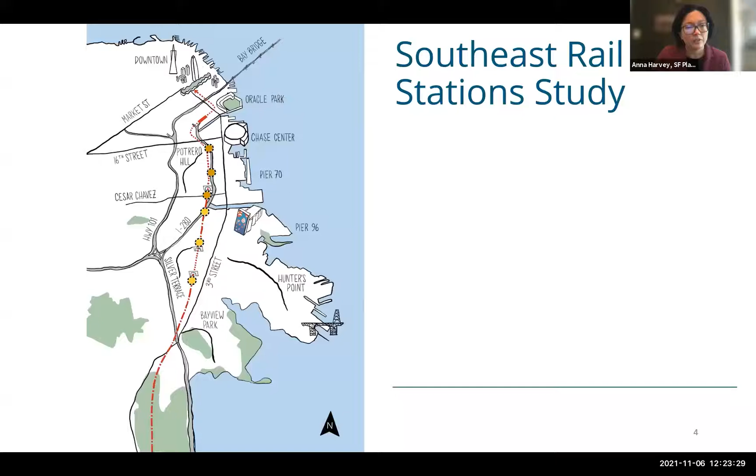Thank you, Anna. Good afternoon, everyone. As we covered in the first round of outreach last month, many changes are underway or planned for the Caltrain corridor in San Francisco, including the electrification of the railroad beginning in 2024, and two planned tunnel projects that will put Caltrain underground, starting with the downtown rail extension project from 4th and King, extending through a new alignment to the Salesforce Transit Center, and eventually extending south from that location beneath Potrero Hill through the Pennsylvania Avenue Extension Project, or PAX. That PAX project could require the redesign or relocation of 22nd Street Station.

The city also seeks to restore regional rail access to the Bayview Hunters Point neighborhoods, focusing on a station concept potentially at Oakdale Avenue, as previously discussed with the community, as well as looking at potential alternatives at Evans Avenue and Williams Avenue. Our meetings from round 1 were recorded in English, Spanish, and Cantonese, and you can watch them on the project website.

To arrive at the 6 alternatives under discussion today, the project team, consisting of staff from San Francisco Planning, the County Transportation Authority, the MTA, and Caltrain, along with a strong consultant team, reviewed the project limits and city and system-wide constraints. For example, we knew that we were considering stations between the existing 4th and King station in Soma and the Bayshore station in the city of Brisbane. We also know from Caltrain's station design guidelines that future train stations need to be accessible and should have 1,000-foot platforms located on a straight segment of track.

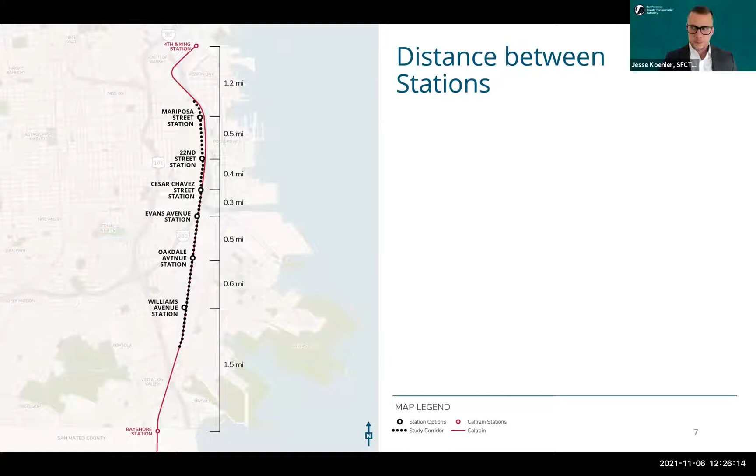Next slide, please. How do existing bus and light rail services and infrastructure connect to these sites? We know that some services are easier to change than others. Bus routes can generally change and bicycle and pedestrian facilities can be added, but light rail cannot move as easily, and all changes must compete for valuable resources.

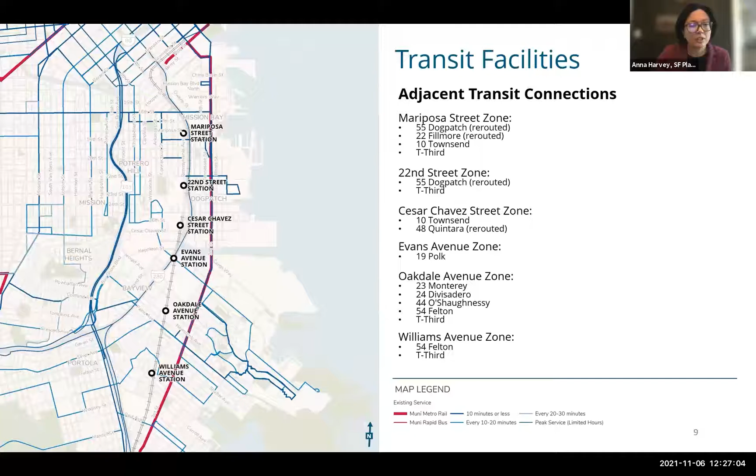Meanwhile, it's not easy and sometimes not possible to change major natural or built barriers to mobility, such as hills, creeks, Interstate 280, or large industrial uses. These barriers affect how easy or difficult it is to access the different station options.

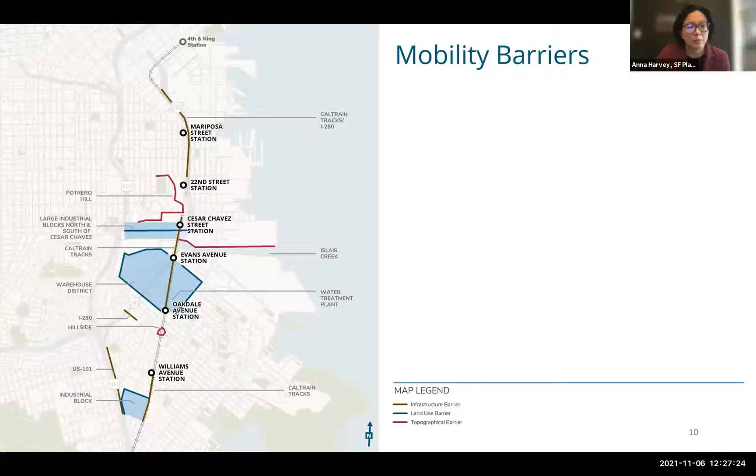Note that the area around Cesar Chavez, sorry, can you go back one slide? Thank you. Note that the area around Cesar Chavez and Evans is hatched in gray to protect the privacy of the small number of households in that zone.

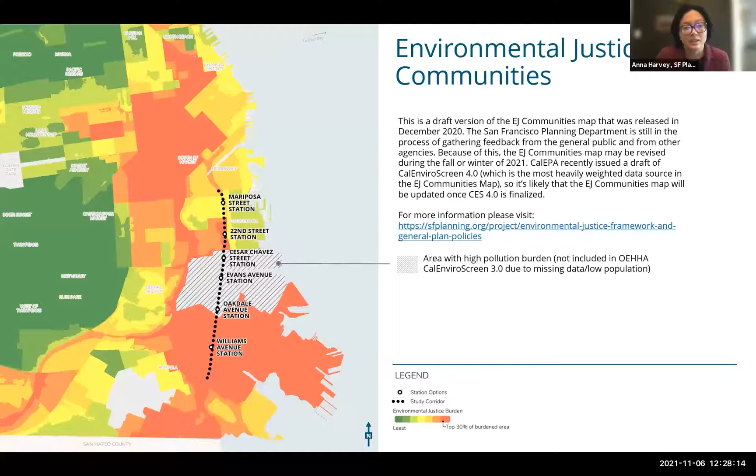This next slide shows approved and planned developments that are under construction or expected in the future. At a high level, you can see high concentrations of housing planned around the Dogpatch Potrero options in the north, large commercial projects in the center of the map, and smaller residential and commercial projects in the Bayview neighborhood south of Oakdale and around Williams.

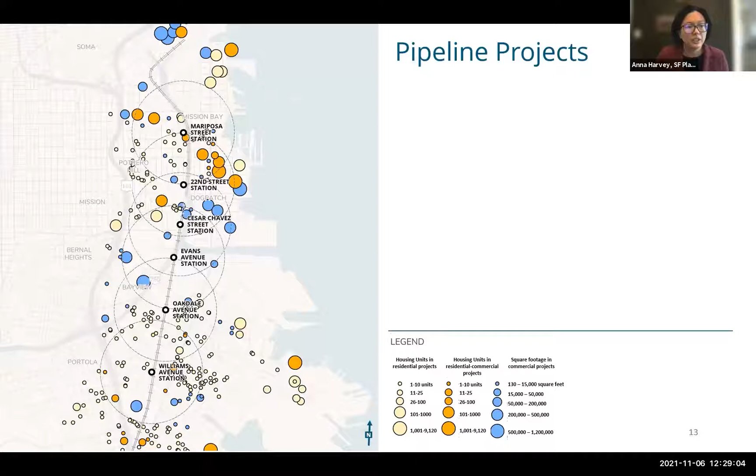These are just some of the maps that we've developed to inform our assessment of pros and cons for each alternative. In this next segment of the meeting, we can drill down further into individual sites and share some concept sketches of what various station options could look like.

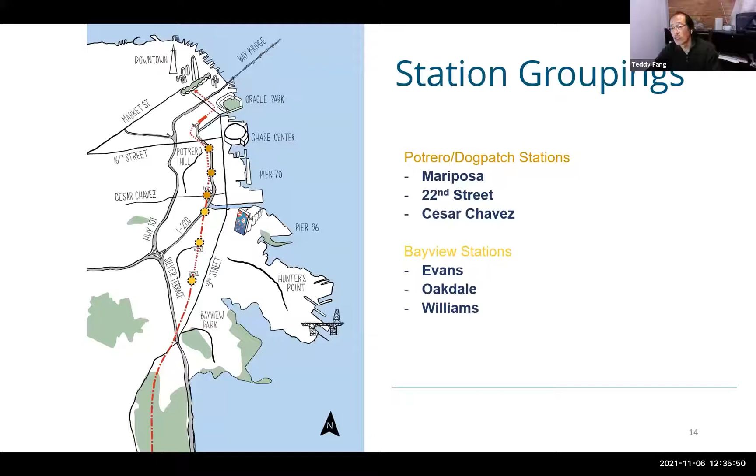Thank you for your comments, Teddy. I appreciate that, and the fact that we had the opportunity to speak on the phone earlier this week. For the group, I wanted to note that back in February of 2020, Caltrain passed their rail corridor use policy, which looked at adjacent parcels on and around the Caltrain right-of-way, of which the Florence Fang Community Farm is one. I attended the meeting where that policy was approved and was very impressed by the strong showing of the community in support of the farm.

So as I went into this work over the last couple of years, the community farm has been very much on our radar regarding the Williams option. We hope we can provide any additional information about the Williams option, and note that it is not currently anticipated to impact the farm, but we appreciate the community's mobilization and feedback regarding this.

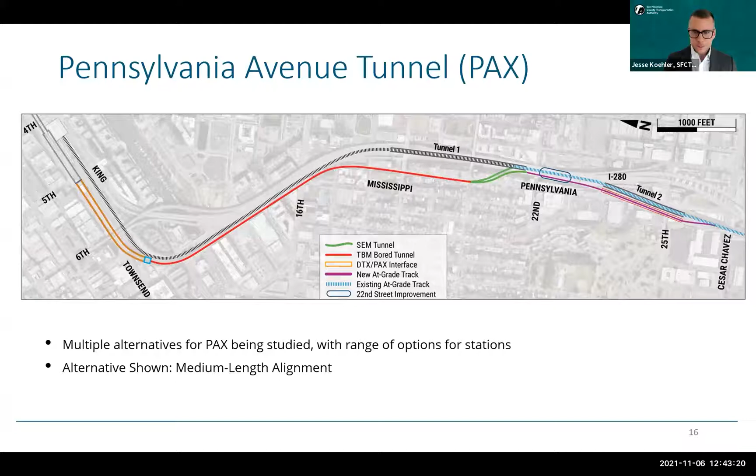This slide summarizes some of the advantages and trade-offs of these three station locations, which I'll quickly go through. When thinking about a station at Mariposa, this station is farthest from the Bayview and therefore would have a nice station spacing, assuming the development of a station in the Bayview. The station site would serve existing 22nd Street riders, as well as Mission Bay, some of the new waterfront developments, as well as the Chase Center. Mariposa also offers access to major crosstown transit connections on 16th Street.

The team did consider a station on 16th Street itself, but ultimately concluded that that would not be feasible due to the track alignment required to eventually connect to the downtown rail extension. Thinking about some of the cons of Mariposa, the ultimate compatibility of this location with the PAX tunnel's design is not yet known. The location is tricky because of the curve to the north, the freeway to the east, Potrero Hill to the south, and residential neighborhoods to the east. A Mariposa station would be located within the PAX tunnel and thus would be quite deep and thus rather expensive.

At 22nd Street, there are a number of design alternatives. Depending on the PAX design, the 22nd Street station could remain in place beneath the freeway or be built in a deep tunnel similar to Mariposa. 22nd Street is familiar and already well integrated into the urban fabric, and it serves existing riders as well as new waterfront developments. The design option that would require rebuilding portions of the station in the current location would be significantly less expensive than building a new station within the tunnel at either 22nd Street or Mariposa. If PAX were not built at all, the station would stay in this location and the city would work with Caltrain to implement accessibility and customer improvements separately.

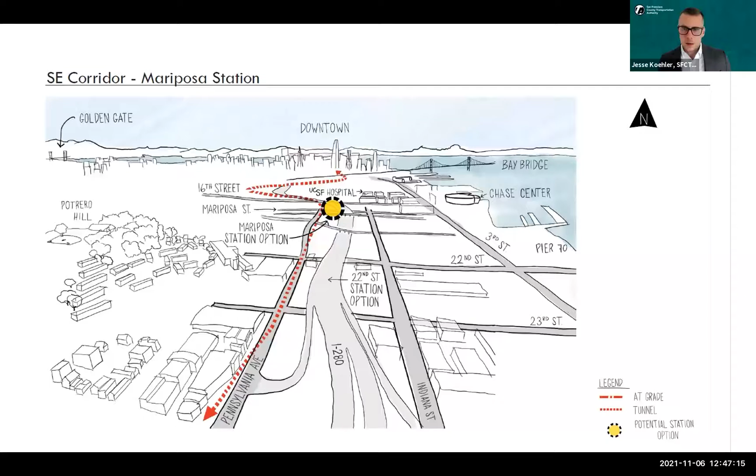Riders can access the station from 16th Street, 17th Street, and Mariposa, both east and west of the freeway.

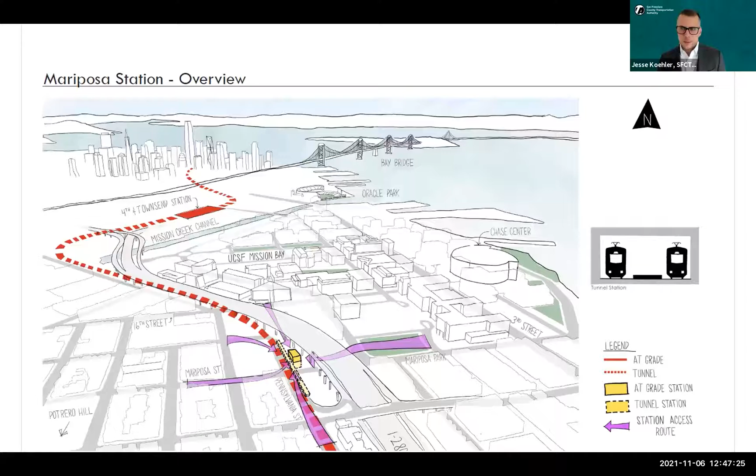Moving to 22nd Street, this station would be in the same general location as the existing station. As mentioned previously, there are a number of design alternatives at this location, each of which would work with one or more of the different potential PAX tunnel options.

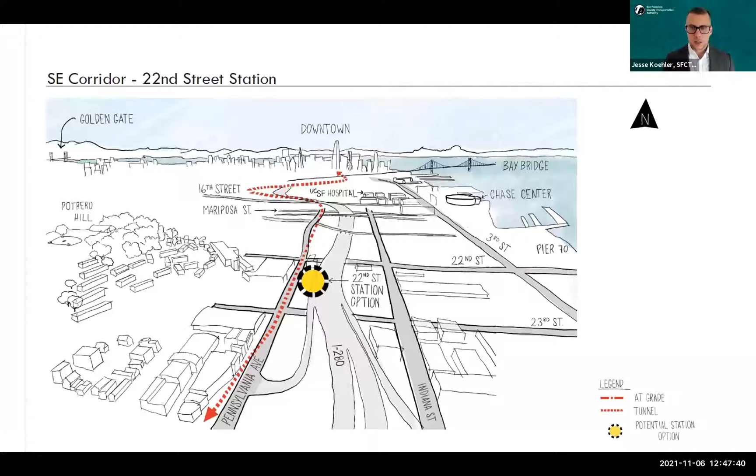This image shares one of those potential approaches, which would involve rebuilding the current station while improving accessibility and user experience. This view is from someone standing on the 22nd Street Bridge looking south away from downtown.

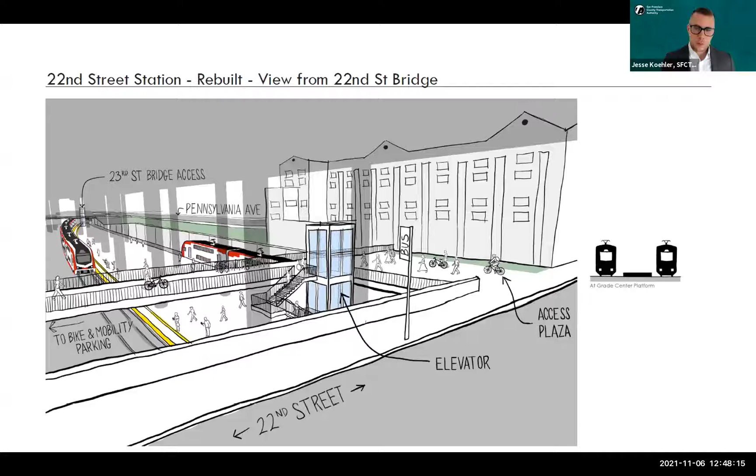The current station has side platforms. Under this approach, there would be a new center platform to serve passengers traveling in both directions. As explored in Caltrain's current 22nd Street ADA access study, this option would also add an elevator or ramps, as well as create a point of access from 23rd Street.

Finally, we'll move to Cesar Chavez. This station would straddle Cesar Chavez and Marin Streets just west of the 280 freeway. This image is looking towards Potrero and downtown from the south.

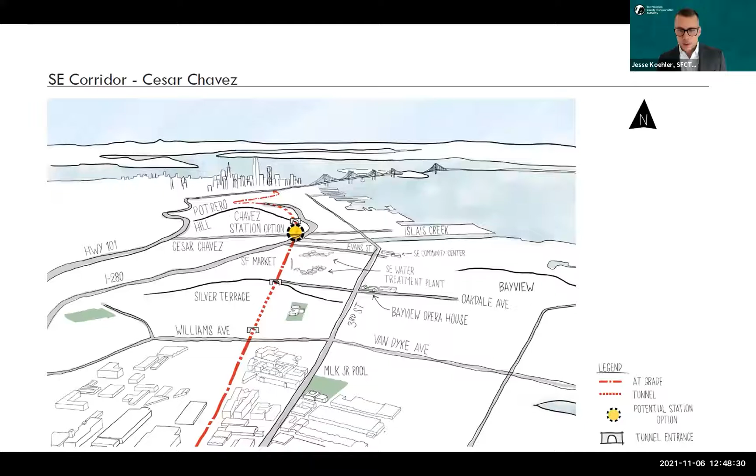Riders could access this raised station from Cesar Chavez or from Tunnel Top Park on 25th Street. The station will be difficult to squeeze between the Potrero Hill Tunnel and the I-280 freeway, but we think there is just enough space.

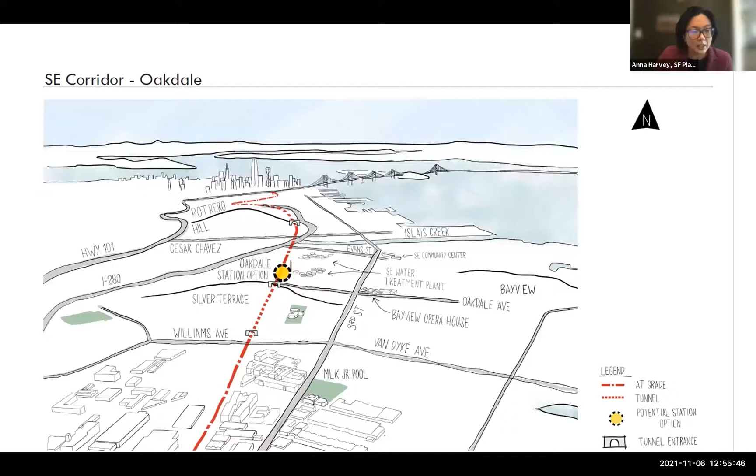As we've noted, this location is the stated preference of the community over many years and many prior planning studies. It's fairly central to the Bayview community, although one side of it abuts more industrial land uses than residential or commercial. Also, the width of Oakdale and the quality of its transportation amenities, including bike lanes, bus service, and parking, make it a good place to connect to regional rail.

Looking north towards downtown on this slide, the station would be an open air station, but would be below street level where the tracks currently are today. This presents challenges similar to those at existing 22nd Street station in that long ramps or elevators would be needed to reach the platforms from the street.

All right, and next is Williams.

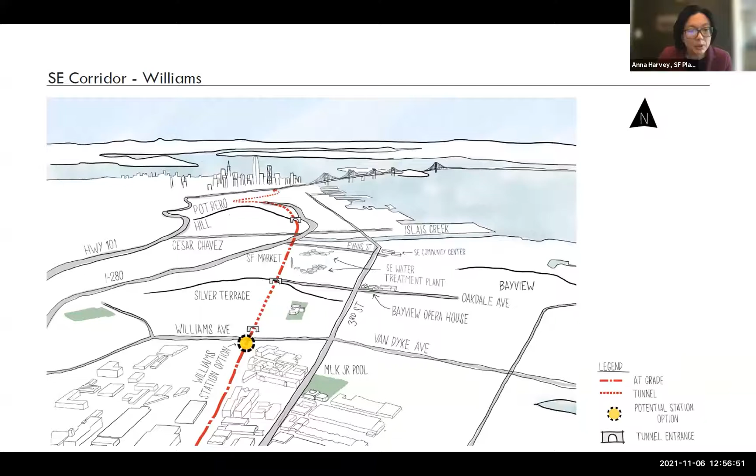The Williams Station concept includes a platform south of the tunnel portal, on the other side of the hill from Oakdale Avenue, extending under and south of Williams Avenue. This site is located within a residential neighborhood and along a commercial corridor, with the community farm above the tunnel portal to the north.

Bus service on Williams gives a local transit connection to regional rail, and the 3rd Street commercial corridor and the T-3rd light rail line are also a short walk away. This location also has a freight spur track to deal with.

Looking north towards downtown, riders would access the station from Williams Avenue, Egbert Avenue, and Carroll Avenue. The storage units west of the Caltrain tracks would likely need to be relocated. Just like Oakdale and 22nd Street, this station concept would require long ramps or elevators to be accessible. The Florence Fang Community Farm would not be impacted by the proposed design.

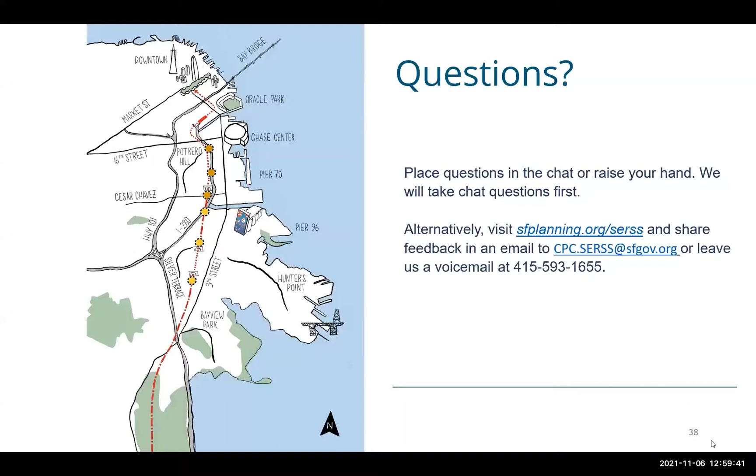My question, as part of the Oakdale redesign: Newcomb Avenue terminates at Phelps Avenue and is at grade with what would be the tracks and platform for an Oakdale station. Has the option of creating a path from the end of Newcomb at Phelps been considered, to avoid some of the complications you're raising about the Oakdale location, instead of focusing on Oakdale having only ingress and egress from Oakdale?

Great point, Chad. I and other members of the team noticed this when we walked around the site before — it's definitely been brought up as a potential option. We would need to talk with PUC, City College, and other stakeholders to see about access through that area. But it certainly makes sense to try to get better at-grade access to the tracks through the surrounding parcels. So we will explore that and document it as something needing further exploration in the next phase.

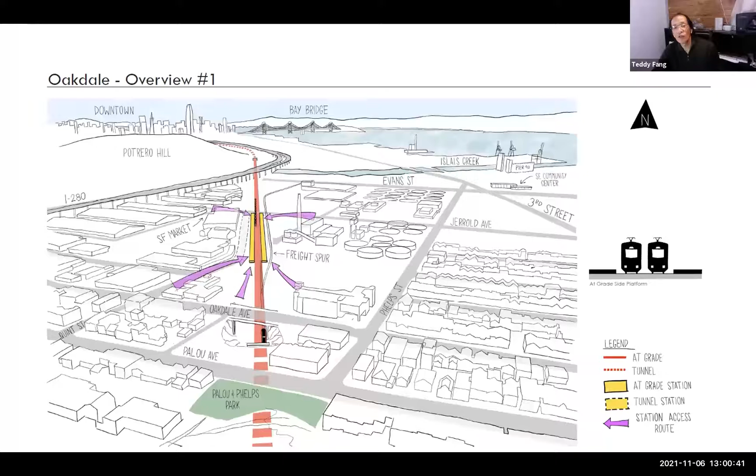Yes, I had a similar question about Evans Avenue, although in a bit of a different direction. I've heard a lot of support in the community for the Evans Avenue station. My question was, you mentioned that people want it there because of the Southeast Community Center being built there — have people actually said that, or is that just an assumption?

Not an assumption — the people I have heard from directly about this are policymakers. They may have heard it from the community, but it's something passed on to me by other policymakers as something we should look at. Jesse, did you want to add anything? Nothing further from what you said. Yeah, thanks. Thanks.

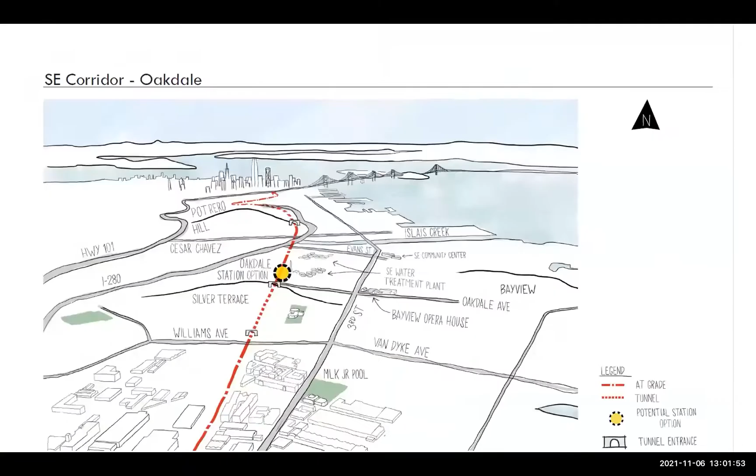Absolutely, please go ahead. I live in the Bayview, on Newcomb Avenue, and I like the idea of the Oakdale station. I'm strongly putting my preference towards that, but my question is about the building next to the proposed station there. Is there the possibility, and I know it's owned by the PUC, but has it been looked at to use that building as some form of station that would have the ability to have businesses or some form of other community engagement, rather than just having a platform?

I really think that building is not as well used, especially since we're going to have the new community center online on Evans in the very near future. Has it been looked at to have some form of alignment with the PUC to use that building not just as what it's used as currently, but also as part of the station itself, so it can have businesses or any kind of other community aspect that could benefit the surrounding area?

Great question, and thank you for it. We have talked quite a bit about the location of this building, as well as the attributes of Oakdale that make it, by the confluence of having essentially a community facility as well as a really good, well laid out street, a good location for a station. Additional conversations would need to be had with PUC and City College about their future plans for the building, but I think it's a great idea.

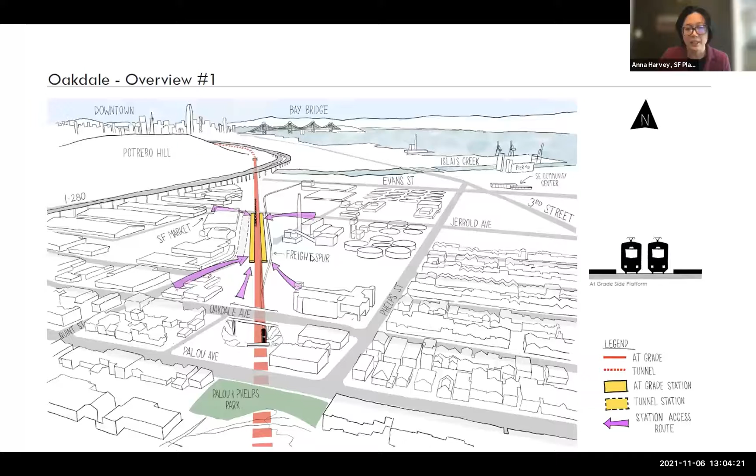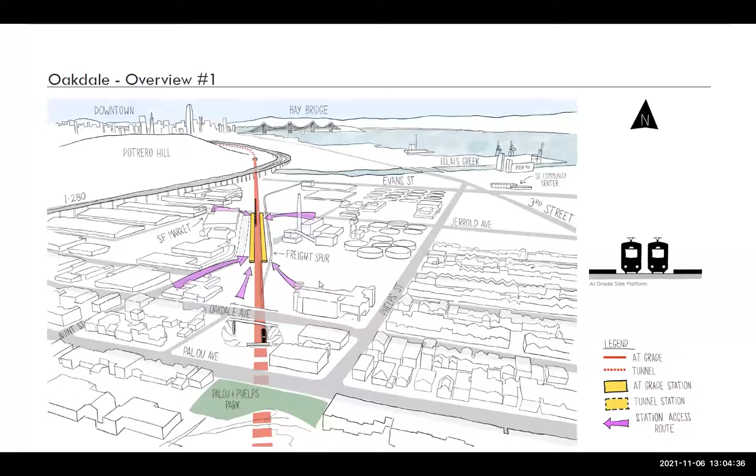I know you mentioned that the station on Cesar Chavez could be accessed via Tunnel Top Park, but how would that station build out affect Tunnel Top Park, or would it at all? In terms of any kind of physical changes to the park?

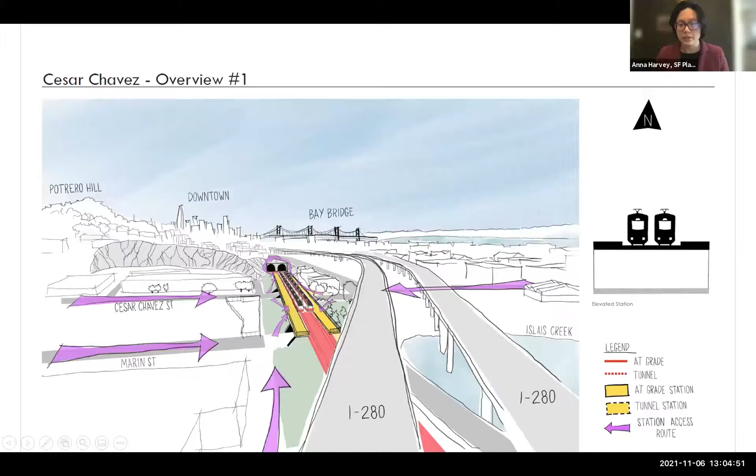I'm going to hand that one to you, Jesse. Sorry, I admit to reading a comment in the chat while that came in, but I believe the question was about how a station at Chavez might affect Tunnel Top Park specifically, as well as the construction of PAX potentially. Got it.

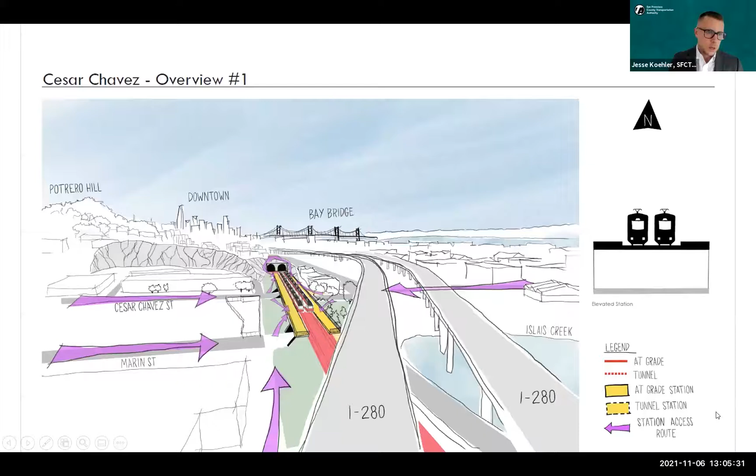The extent of any impact with respect to PAX would depend on which PAX alternative is ultimately selected, should the project move forward. One of the options under consideration would have a portal in the vicinity of the existing tunnel portal beneath Tunnel Top Park, and so construction of the new project would result in some activity in the vicinity of that location. The PAX project, as it advances, would be expected to go through an environmental review process, with any designs contemplated through that process being subject to the full gamut of technical studies to determine the scope and nature of any impacts and what mitigations would be required.

With respect to impacts specifically on Tunnel Top Park, there's no expectation for either the PAX project or the Cesar Chavez station that there would be a direct impact on the property. As we noted in the presentation, if a station were constructed at Chavez, we would want to work with the community through later stages of design to determine whether, how, and in what fashion there would be an ability to make pedestrian connections from the north end of that station up Potrero Hill in the vicinity of Tunnel Top Park, and that would be the subject of later design work.

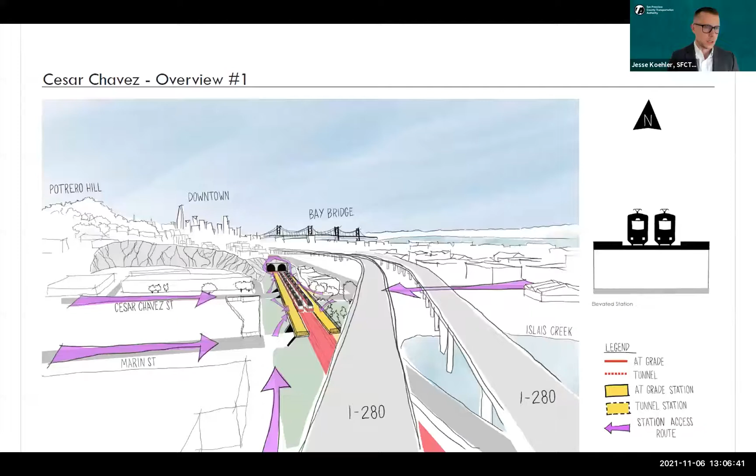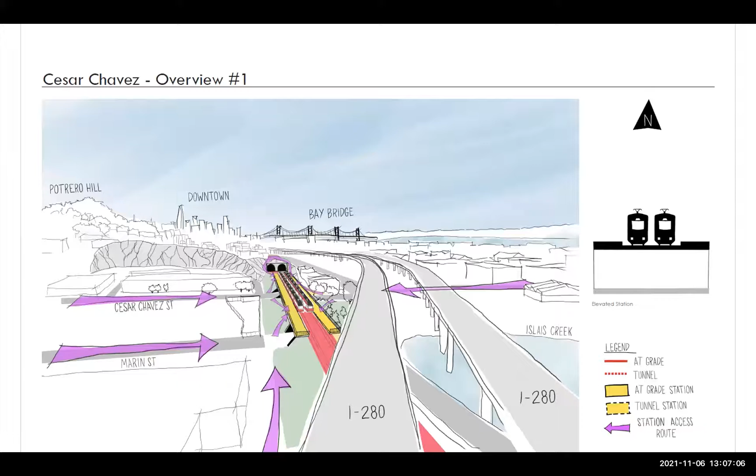I have a question about access in terms of when you look at these different options for the three on Potrero Hill. Did you come up with, or have people weighed in about, which station they feel is easier for the public coming from both Dogpatch and Potrero Hill to access, in terms of equitable access?

Go ahead, Jesse. Thanks, Anna, and thank you for the comment and question. We've heard a variety of perspectives on that point and would welcome input from anyone on the meeting today. Of course, because it's an existing location, the 22nd Street station is relied upon and used by both regular commuters and others who use the Caltrain corridor for their daily commute.

Others have expressed an interest in the Mariposa location, given that, particularly if a station were also constructed in the Bayview, the Mariposa station would have good connections into Mission Bay and some of the communities in Dogpatch and Potrero that are a little further north. So there are certainly differing opportunities and impacts of all the locations, with all the attendant trade-offs.

The final thing I'll add is that on the Cesar Chavez location, the immediate adjacent land use is not generally particularly transit-oriented. That's not to say that a station, particularly a regional rail station, couldn't be constructed there, but the supporting bus network and pedestrian and bicycle network would need to be appropriately developed to provide access to that location for passengers from other parts of the surrounding areas.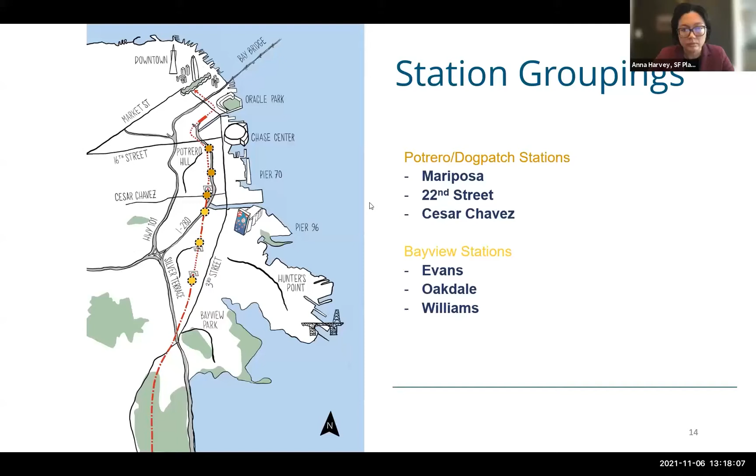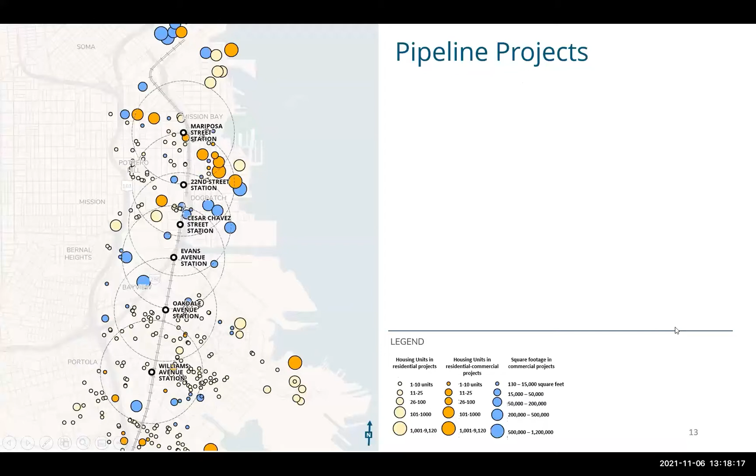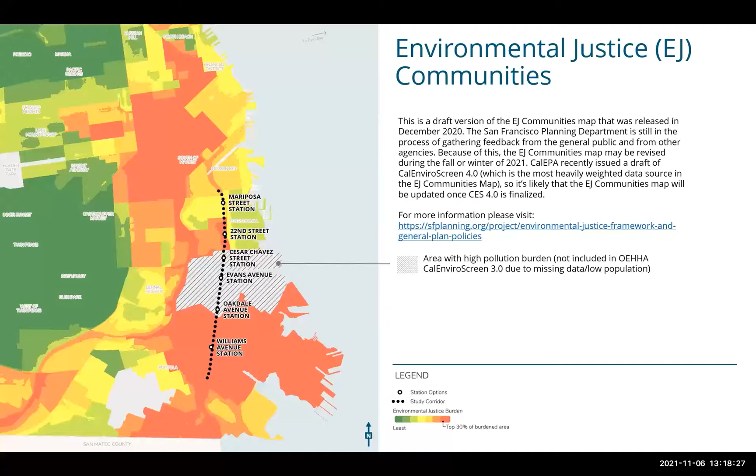Thank you. The previous slide where we're analyzing the potential demographics around the stations has a smaller radius than the 2005 study, the one with the multicolored circles. My recollection was the 2005 study that considered the Oakdale station was looking at potential significant ridership from neighborhoods like Bernal that don't seem to be captured here. Also a large amount of the growth in the Southeast is anticipated where the shipyard was and where Candlestick Park was. That's well outside of this, but it's anticipatable in the near future. So can you comment on how those neighboring communities, in particular the potential growth, are figured in, given that this says developed land use and has a much smaller field of vision?

Absolutely, great question, thank you Chad. I think it's one we should incorporate into our scoping for the next phase about the new Bayview station. We used these 1-mile radii just as a rule of thumb as we created these comparative graphics. I realize a circle is just a geometric shape and may not actually have relevance in terms of giving us an accurate picture, but it is how we drew our project constraints and how we would compare and contrast. I think one thing to note is that the community's preference for Oakdale, as well as the ridership justifications for Oakdale, are well documented and I'd say established at this point. I also know that Oakdale as a station concept, as well as a community priority, really did come out of this need to restore regional rail access and provide additional mobility options, given the large increase in density we're going to see, as you noted, in the India Basin and shipyard areas. So good point, and in the next phase we should look beyond a simple radius.